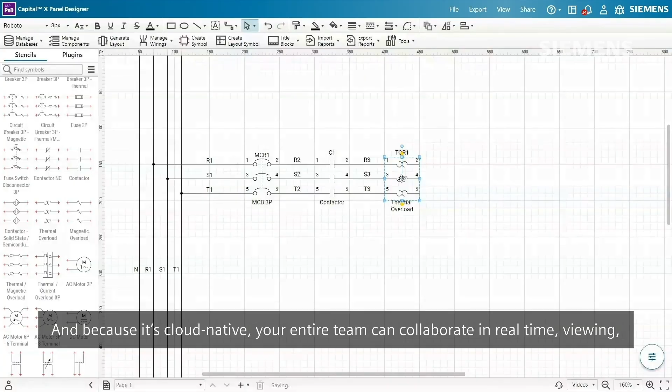Because it's cloud native, your entire team can collaborate in real time, viewing, editing, and commenting on the same drawing simultaneously, regardless of time zone differences. As a subscription-based model, it's scalable and eliminates the need for dedicated hardware—no physical servers, IT infrastructure, or costly maintenance fees. It's a flexible and cost-efficient choice for modern engineering teams.

If you need an offline workflow, the standard plan offers Capital Panel Designer on-premise, a desktop-based installable version of the software. This is ideal for use in environments without internet access or when working on-site during system commissioning. The subscription plan also includes access to the cloud-native Capital X Panel Designer, offering the flexibility to work seamlessly both online and offline. Capital X Panel Designer is trusted across a wide range of industries, including industrial machinery, heavy equipment, process manufacturing, energy, and more.

In this video, we'll walk you through the complete schematic design workflow, from setting up your drawing to exporting your final design in multiple formats. Let's begin with an overview of the dashboard layout.

To create a new drawing, click Create, then select New Drawing, or right-click anywhere and choose New Drawing. To open an existing drawing, either use the search bar to find specific drawings, templates, folders, or navigate directly to the drawing and click Open.

Select Share to instantly share your drawing via email or a link. This simplifies team collaboration by ensuring all your stakeholders have access to the latest revisions without back-and-forth emails. You can also set custom permissions when sharing to control who can view, edit, comment, or manage the drawing.

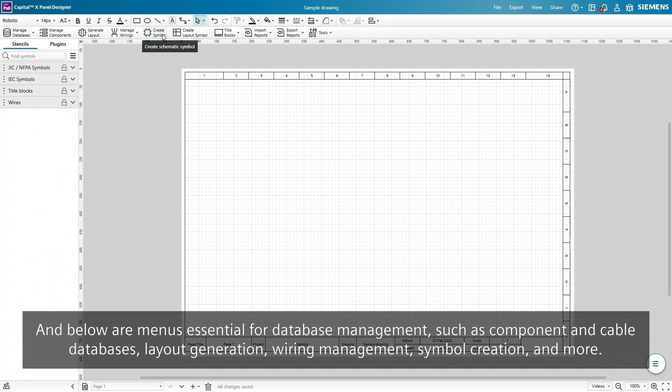On your left, the stencils give you instant access to thousands of pre-designed symbols for electrical, pneumatic, hydraulic, and P&ID drawings that are compliant with JIC and IEC standards. No need to search for symbols externally, just drag and drop them into your schematic for a faster circuit design.

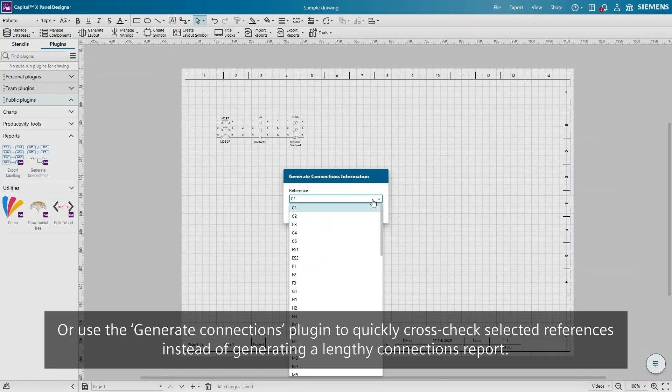If you switch to the Plugins tab, you can use our public plugins to automate tasks. For instance, the Export Labeling plugin automatically generates wiring labels, and you may easily modify and upload them to your label printer. Or use the Generate Connections plugin to quickly cross-check selected references instead of generating a lengthy connections report. You can even create custom plugins by selecting New Plugin and writing your own script.

In the bottom left corner, an icon indicates whether you're editing a personal or team drawing. Just beside it is the Pages menu, where you can set up or edit your page settings, including page size, orientation, margins, scale, and the measurement unit. We will go with the default settings for this demo.

One of the key benefits of Capital X Panel Designer is its powerful automation capabilities, which we will demonstrate later in this video. To manage these tools, go to File, Preferences, and drop down Capital X Panel Designer options. Here, you can enable or disable automation features like auto wiring, automatic wire splitting, and smart renumbering based on your workflow preferences.

Let's begin the schematic design process by building a PLC circuit. Along the way, we'll highlight Capital X Panel Designer's smart automation tools and productivity boosting features.

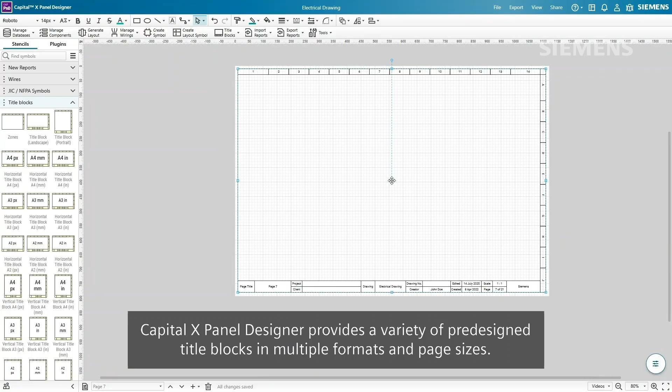First, we'll open the title block stencil to drop a title block on the drawing. X Panel Designer provides a variety of pre-designed title blocks in multiple formats and page sizes. The title blocks automatically include drawing information such as the page title, drawing name, scale, and more.

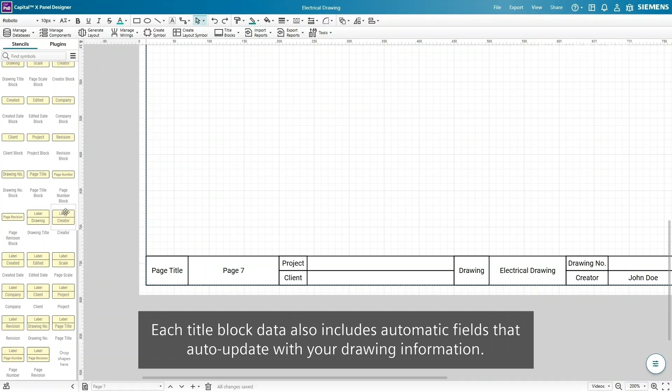You can also build your own title blocks by placing individual title block data from the stencil. Each title block data also includes automatic fields that auto-update with your drawing information. Once your custom title block is complete, go to Menu, Title Blocks, and select Create Title Block to save it into your stencil library.

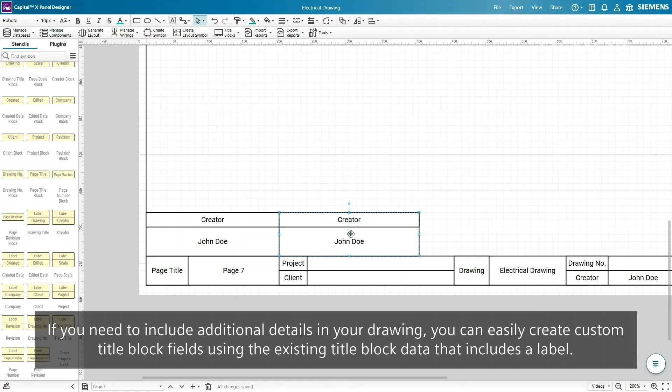With both pre-designed and customizable title block options, you can quickly create professional and consistent documentation while reducing manual input. If you need to include additional details in your drawing, you can easily create custom title block fields using the existing title block data that includes a label. Once dropped onto the page, align it with your title block, select the subshape, and enter your preferred label. For instance, we'll change the label to Last Revised By.

Then, go to the Title Blocks menu and select Insert Title Block Data. From here, enter your custom label and value and choose whether the changes should apply to the entire drawing or just the current page by setting the scope. Once complete, click OK to apply.

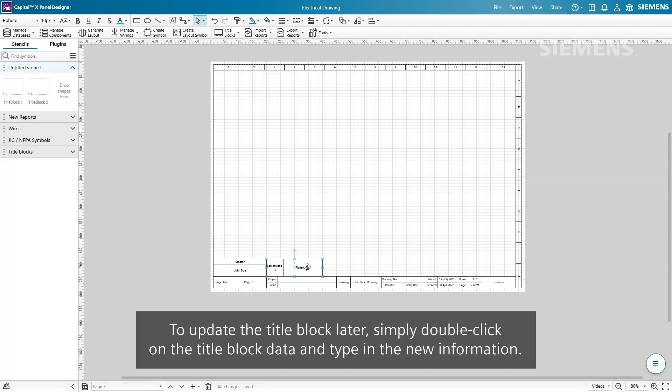If you intend to reuse this as a template in future projects, you may save it into your stencils like we demonstrated earlier. To update the title block later, simply double-click on the title block data and type in the new information. Alternatively, an easier way would be to right-click on the title block, select Edit Title Block, and update all the title block fields in one go.

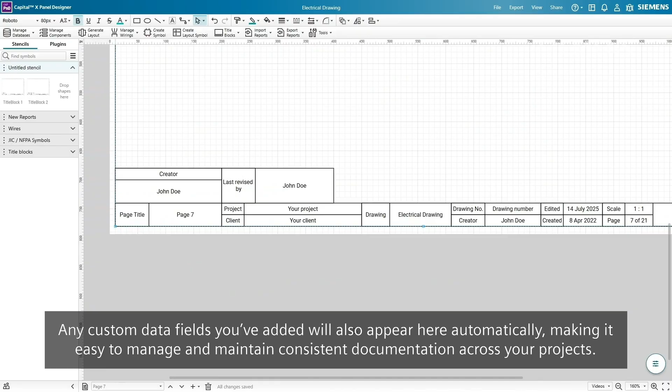Any custom data fields you've added will also appear here automatically, making it easy to manage and maintain consistent documentation across your projects. This flexibility allows you to tailor your title blocks to meet internal standards or customer-specific requirements.

When it comes to symbols, you have instant access to thousands of standards-compliant symbols in the stencils, but for specialized or industry-specific needs, you can also create your own custom symbols. To create one, start by drawing with shape tools or by importing a DXF DWG file.

We'll import and customize a MCB4P symbol in DXF DWG format as an example. Ungroup the imported shape to make necessary edits, and once done, group the elements again. Use the Draw Connectors tool to add connection points. Hold the Control key and click to place each connection point on your symbol.

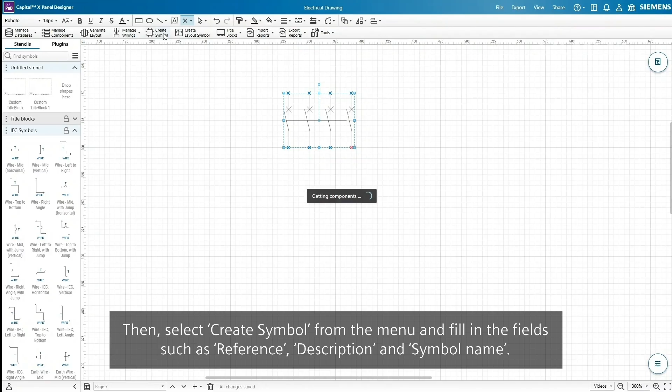Then select Create Symbol from the menu and fill in the fields such as reference, description, and symbol name. Choose the appropriate category and stencil for saving. Then, switch to the Pin Name tab to assign the pin names accordingly. Once everything is set, click OK to save the custom symbol to the stencil library.

You may drag and drop it into future projects without needing to recreate it from scratch. Like the built-in symbols, custom symbols are intelligent. They can be linked to real-world components and benefit from automation features like automatic numbering, making your designs faster and more accurate.

In addition to using our pre-designed symbols and creating custom symbols, you can also speed up your workflow by importing manufacturer-specific components directly from the CADENAS Cloud Part Library, 3Dfindit. Go to Manage Databases, select Component Database, and click Import from 3Dfindit to expand the window.

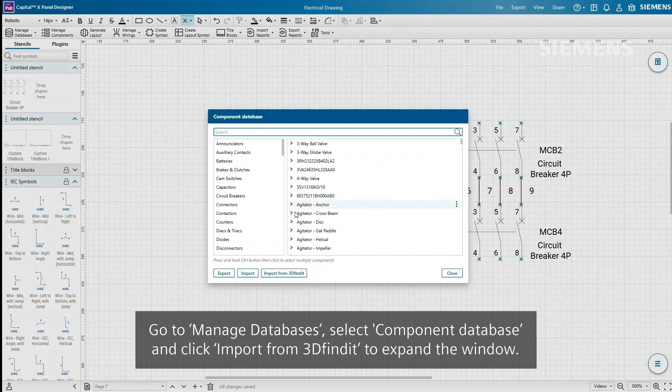There are millions of components and layouts available for your usage, where you can easily browse and select the one you need. If you have a specific component in mind, input its name or model number into the search box. Select the Send to CAD button to import both the component and its corresponding layout symbol into X Panel Designer.

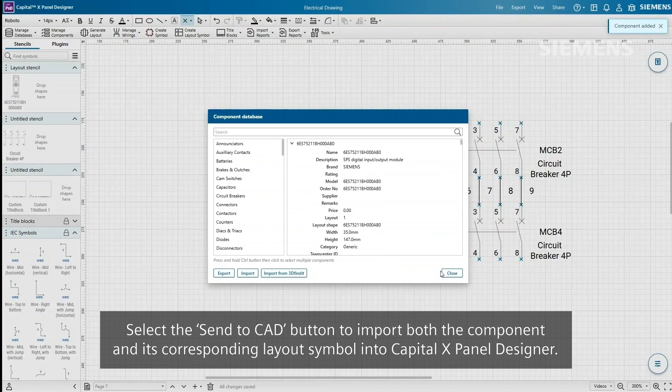You can then start assigning the component and layout to a symbol. This built-in integration eliminates the need to manually source and import parts from external sources, drastically reducing design time and ensuring greater consistency.

Now that we've added a title block, we can start placing wires and symbols. Designing schematics in X Panel Designer is fast and intuitive thanks to drag-and-drop functionality. Wires are extremely flexible, allowing you to easily duplicate or rename them by using the Edit Wire option or by clicking on the wire name.

As you can see, the duplicated wire name is automatically incremented. As we are designing a PLC circuit, drop a single-sided PLC symbol, right-click, and select Set PLC Module.

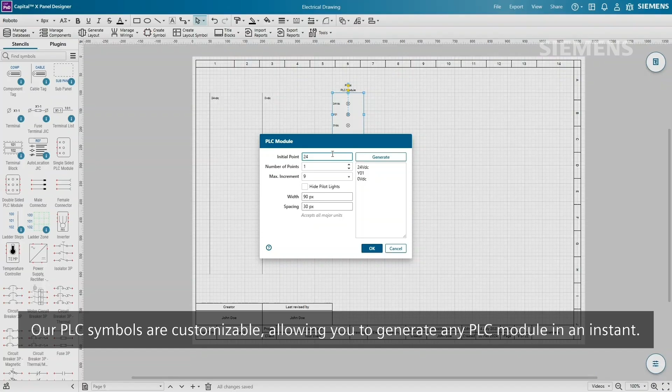Our PLC symbols are customizable, allowing you to generate any PLC module in an instant. In this case, we'll generate 10 output points, so we set the number of points fields to 10, adjust the spacing as required, and click Generate.

You may also manually modify the PLC labels by entering your preferred pin names. When done, click OK to generate the PLC module.

Next, connect the PLC points with wires. When two wires are connected, a connection dot is created automatically. When the wire is moved, the connection dot will be automatically deleted. To show or hide wire names, right-click and select Show or Hide Wire Name.

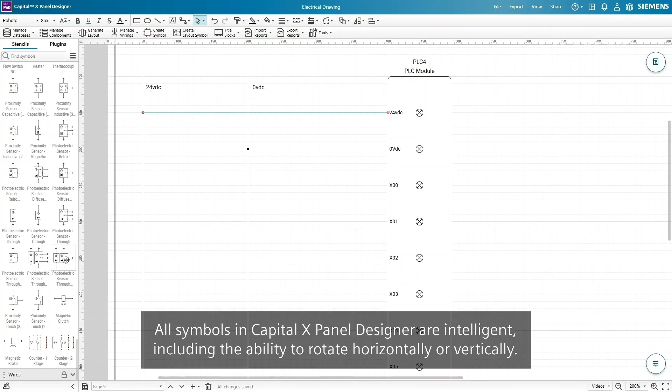Next, we'll drop a through-beam sensor symbol from the stencils and flip it horizontally. All symbols in X Panel Designer are intelligent, including the ability to rotate horizontally or vertically. Notice when the symbol is aligned with the PLC outputs, it is automatically wired.

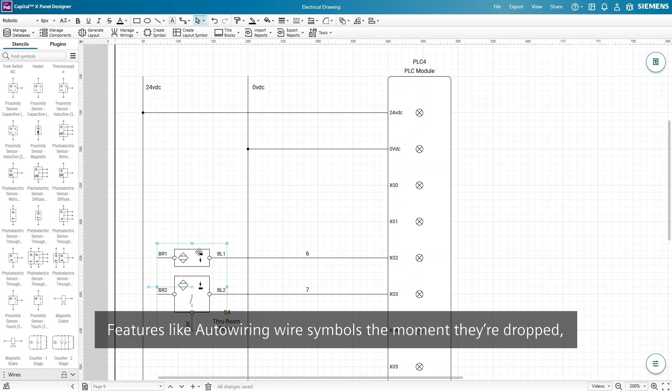Since wiring is one of the most frequent and time-consuming tasks in electrical design, we've automated it to save you time and effort. Features like auto-wiring wire symbols the moment they're dropped, and wires stay connected as you move the symbols, keeping your circuits clear and accurate with minimal manual work.

Now, we'll add a proximity switch symbol. By right-clicking and selecting Edit Reference, you can hide the reference or the description of the symbol.

When duplicating symbols, wires, or even entire circuits, X Panel Designer automatically renames them, saving you time from tedious manual renaming. Watch what happens when we place a selector switch symbol on an existing wire. The wire automatically splits and renames itself.

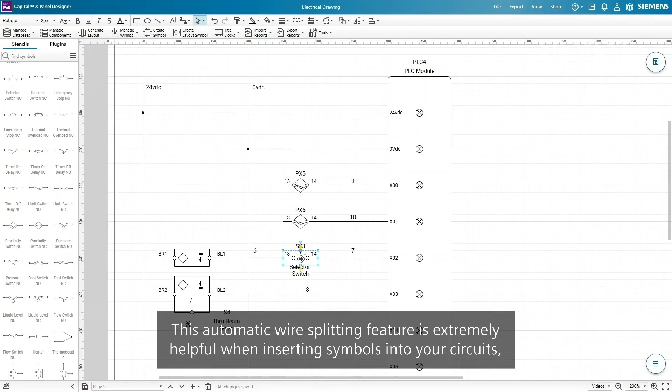This automatic wire splitting feature is extremely helpful when inserting symbols into your circuits, saving you the hassle of manually adjusting or redrawing connections. You may also change a symbol's description in the Edit Reference dialog and confirm by clicking OK.

Similarly, when we drop a push-button symbol on a wire, the wire automatically splits and renames itself. Let's go ahead and modify the symbol's description as well.

With automation built in, X Panel Designer saves you time at every step so you can focus more on design logic and less on repetitive work. Even complex schematics are made easy thanks to its smart automation tools and user-friendly interface.

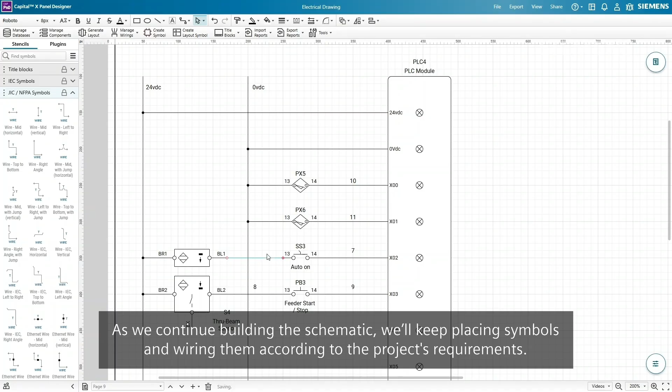As we continue building the schematic, we'll keep placing symbols and wiring them according to the project's requirements. You can freely reposition symbol descriptions or even hide them to ensure your drawing is neat and readable. And as shown earlier, wire names are fully editable. Simply click on the wires and type to rename them.

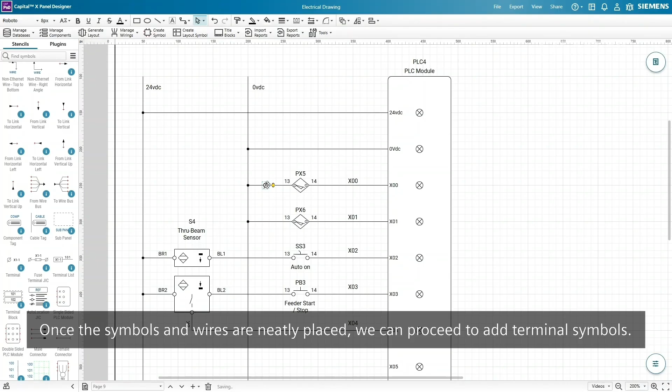Once the symbols and wires are neatly placed, we can proceed to add terminal symbols. Like all the other symbols in X Panel Designer, terminal symbols are intelligent. They can be easily duplicated and dropped directly onto wires. When placed, they automatically split the wire and rename it, saving you from manual rewiring.

After placing them, you have the option to name each terminal directly on the drawing, and these names will be generated in the terminal list later, ensuring consistent and accurate documentation. Alternatively, if you prefer to leave them unnamed during the initial placement, you can name all of them at once with a single click, which we'll demonstrate later. And as shown earlier, you may reposition the symbol descriptions by dragging the yellow handle.

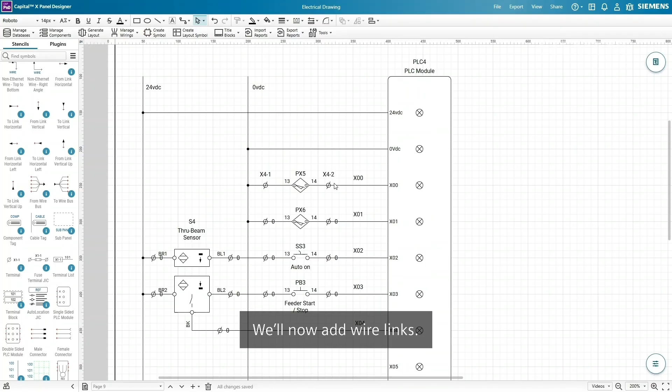We'll now add wire links. Wire links are virtual wires that extend a wire across different parts of your schematic, either on the same page or across pages. Wire links can automatically identify the location of the target wire when you connect them to your wires and double-click to pair them. Once paired, they will automatically display the wire name and location of the target link they are paired to. Double-click to jump directly to the paired link, simplifying navigation across complex designs.

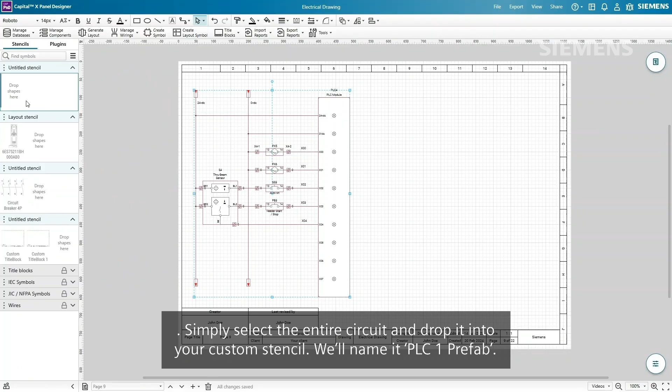In X Panel Designer, you can easily reuse your circuits by duplicating them or saving them to your stencils as prefab circuits. Simply select the entire circuit and drop it into your custom stencil. We'll name it PLC1 Prefab. If saved to a team stencil, it becomes automatically accessible to the entire team, streamlining collaboration and reducing repetitive work.

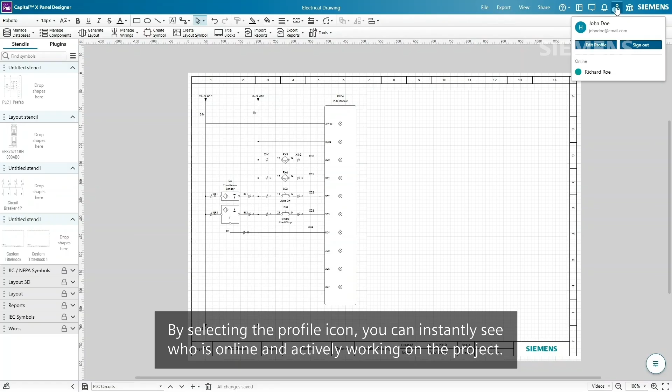As a cloud-native electrical CAD, X Panel Designer is built for real-time collaboration, allowing multiple team members to view, comment, and edit the same drawing simultaneously. By selecting the profile icon, you can instantly see who is online and actively working on the project. As shown here, my colleague already has this drawing open and will now take over to help complete it.

The moment they drop the PLC module onto the drawing, we can immediately see the changes on our end. All updates are automatically synchronized in real time, ensuring that everyone stays on the same page, literally. This seamless workflow helps teams collaborate effortlessly across locations and time zones, preventing communication delays.

To make collaboration even easier, Capital X Panel Designer includes a built-in chat box, allowing you to easily discuss projects with team members, clients, and stakeholders directly within the platform.

Here you can see that my colleague sent a quick message after completing their part of the drawing. Once done, go to the View menu and select Hide Chat Box to close it. You can access the chat box again by selecting Show Chat Box.

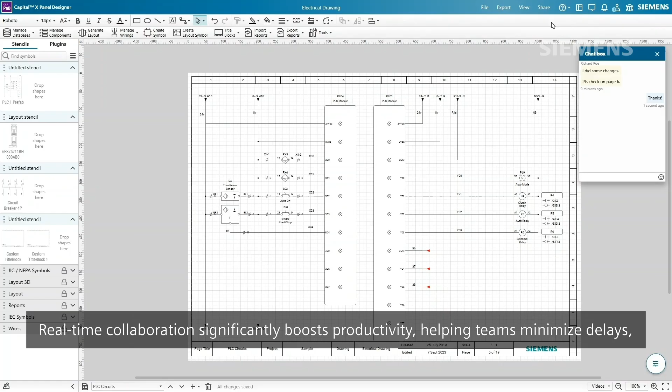Real-time collaboration significantly boosts productivity, helping teams minimize delays, avoid costly errors, and accelerate the overall design process, no matter where they're working from. Capital X Panel Designer automatically saves your progress and maintains a full version history, allowing you to roll back to any previous state of your drawing if needed.

To make it easier to identify specific points in your design process, you can name key versions by going to the File menu and selecting Name Current Version. This is especially useful for marking milestones or review stages, and we'll revisit this later when we demonstrate the version control feature. Let's save this page so that we can reuse it later.

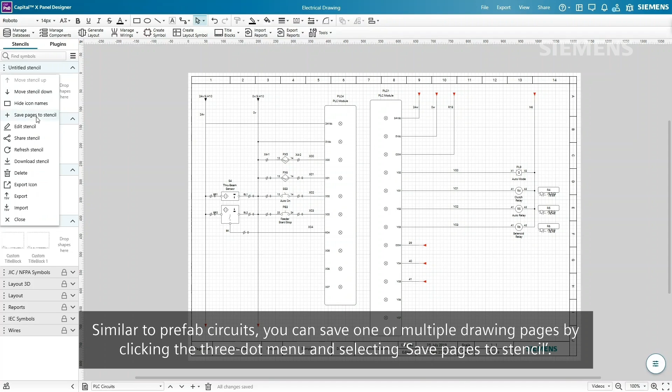Similar to prefab circuits, you can save one or multiple drawing pages by clicking the three-dot menu and selecting Save Pages to Stencil. Give the page a name and click OK to save it. This allows you to build a library of your commonly used circuits and full-page drawings, so you never have to redraw them from scratch again.

Beyond powerful automation tools, Capital X Panel Designer includes cross-referencing tools that make it easy to locate symbols and wires across complex multi-page schematics. To access real-time cross-reference information, right-click on any symbol and select Edit Reference.

On the bottom left is a list of all symbol references in your drawing, which you can filter by page. When you select a reference, its exact location appears on the right. Select it, and the symbol's position will be highlighted in the drawing. This also applies to wires.

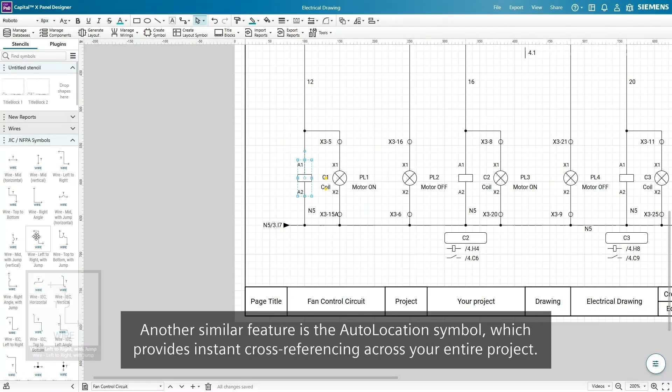Another similar feature is the AutoLocation symbol, which provides instant cross-referencing across your entire project. Drop it from the stencils, right-click, and select Locate Reference. Choose a reference, and the AutoLocation symbol will list all symbols with the selected reference and their locations.

This intelligent symbol updates as you make changes. Whenever a symbol is added, moved, or deleted, the AutoLocation symbol reflects those changes in real time, ensuring accurate cross-referencing at all times.

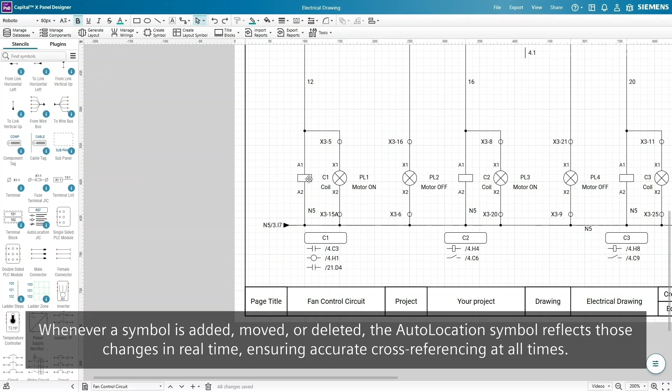Another cross-referencing tool we have in Capital X Panel Designer is the Real-Time Reference window, which provides a centralized view of all symbol references. As you make changes, this window updates automatically, adding new references when symbols are placed and removing them when deleted.

You can also instantly locate a symbol by selecting its reference, navigating to the selected symbol even over multiple pages. Together, these tools dramatically improve navigation, help prevent wiring errors, and reduce time spent cross-checking large or complex schematics. They're essential during panel assembly, where accuracy and traceability are critical.

Next, let's explore how Capital X Panel Designer simplifies the management of components and cables with intuitive menus, whether you're assigning, editing, or creating custom entries.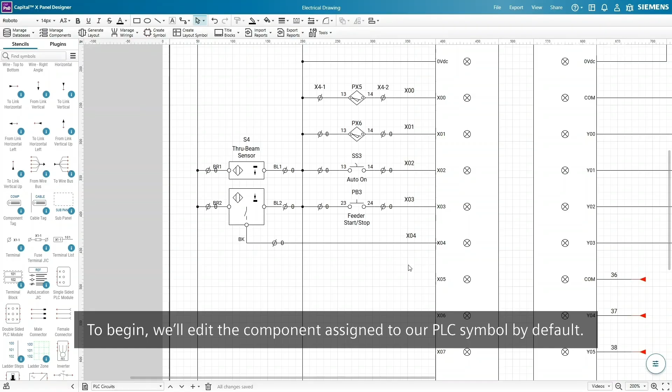To begin, we'll edit the component assigned to our PLC symbol by default. Right-click the symbol, select Edit Reference, then click the Component button. In this case, we'll assign the component we had imported from the CADENAS 3Dfindit library. Click Select to open the component database.

The component database stores all component specifications so that they can be used and reused on multiple projects and drawings. Components are organized by categories and sorted alphabetically, making navigation quick and intuitive. This categorization helps streamline your component selection process, especially when managing large libraries.

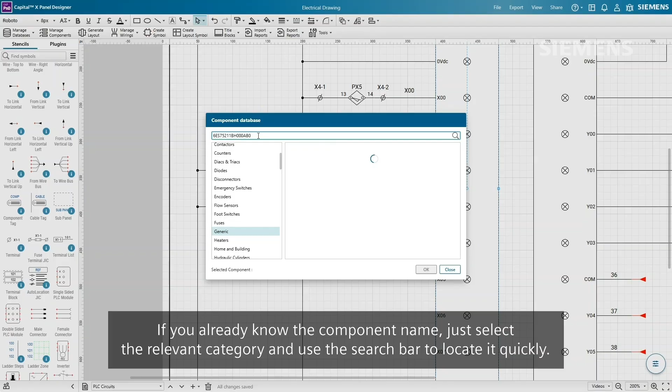If you already know the component name, just select the relevant category and use the search bar to locate it quickly. For example, you can paste the name of the component imported from CADENAS 3Dfindit and click OK to select it. Now let's customize the component's details.

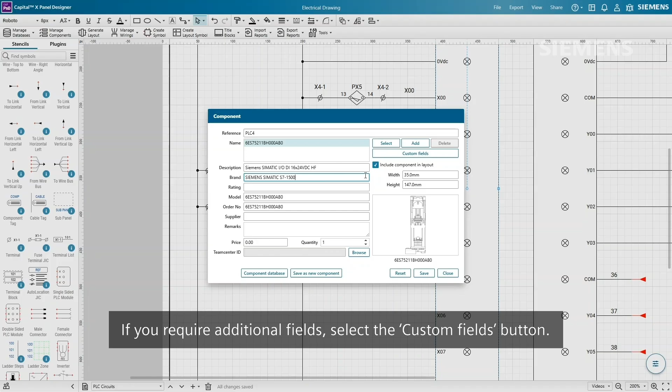You can edit fields such as description, brand, rating, model, order number, and even include remarks. If you require additional fields, select the Custom Fields button. Define the specifications in the label value columns. Select Add Field to add a new row of fields. For instance, here we'll add the maximum and minimum supply voltage.

These custom fields will also be generated in reports and component tags. Once done, click OK to save the custom field to the component, then select Save to store the updated component information.

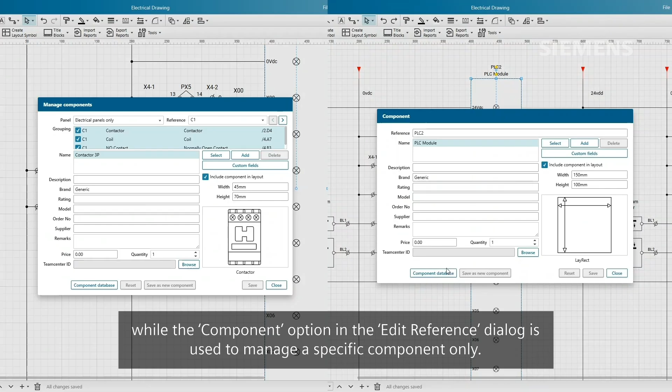Alternatively, you can use the Manage Components menu to manage, assign, and modify all components used across your drawing. This allows you to update component information project-wide, while the component option in the Edit Reference dialog is used to manage a specific component only.

Now let's look at cable management. From the Manage Databases menu, select Cable Database, then click the three dots menu to add a new custom cable or edit existing ones. We'll create a custom cable by filling in the required fields, then click OK to save.

To assign this cable to a wire in your drawing, right-click the wire and select Edit Wire to open the wire window. The wire window also includes real-time cross-reference information similar to the cross-referencing tools demonstrated earlier. Here you can view wire details, insert wires, and assign cables for the current wire. Click Cable, then click Select to assign your custom cable and confirm with the OK button.

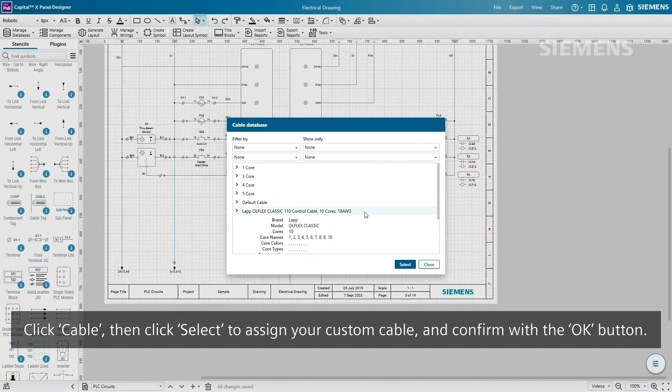You can also manage all cable and wire data across the project by going to Manage Wiring and selecting Manage Cables. This works much like the Manage Components feature, giving you centralized control over every cable and wire in the design. To display component information such as brand, description, and model directly on the drawing, you may drop a component tag symbol from the stencil.

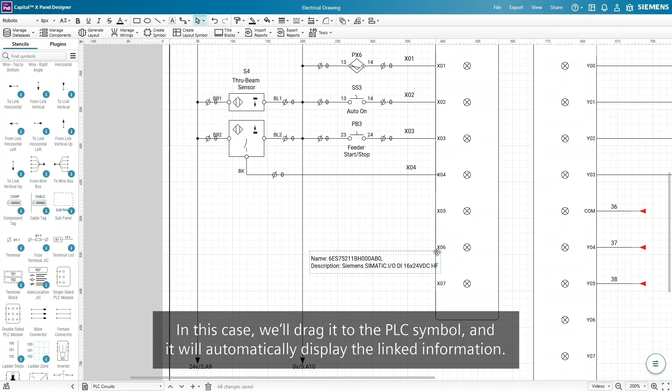Then drag the yellow control point to a symbol. In this case, we'll drag it to the PLC symbol, and it will automatically display the linked information. Alternatively, you can right-click on the component tag symbol and choose Select Reference to view the list of references in the drawing. Click on a reference and click OK to display the component information.

Right-click and select Edit Component Tag to choose the fields you need to display, such as the brand and model. Similarly, use the cable tag symbol to show cable details for your wires. Here's the custom cable we just created. Both symbols dynamically pull information from your assigned data, saving you from manual annotations and reducing documentation errors.

Here's an extra tip: if you need to update multiple component information, you can save time by exporting the material reference report and updating the details in bulk. Click the Export Reports button and choose Material Reference Report. Ensure that all fields are enabled for X Panel Designer to recognize it as an import file, then click OK.

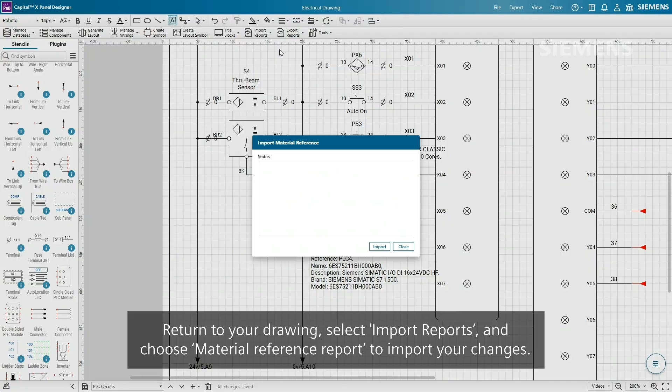Open the downloaded TSV or CSV file in your preferred spreadsheet editor and start updating the component information. After editing, save the file in the same format. Return to your drawing, select Import Reports, and choose Material Reference Report to import your changes. Your component information will be instantly updated, reflecting your modifications.

In X Panel Designer, you can simplify the process of updating design information by exporting and editing it in one go. With structured component and cable management, you can easily locate, modify, and reuse data across multiple projects while reducing manual entry. Next, let's look at how X Panel Designer simplifies terminal management with automated listing and renumbering features.

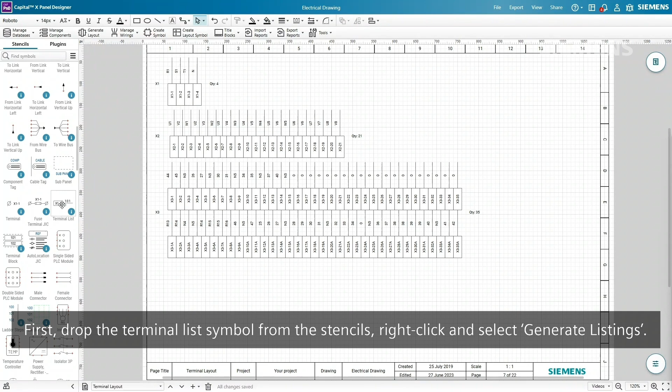As shown here, terminal listings have already been generated for other pages in this project. Now we'll generate the terminal listing for the PLC circuit we just created. First, drop the terminal list symbol from the stencils, right-click and select Generate Listings. You'll have the option to generate terminal lists for the current page or across all pages.

We'll select all pages to automatically include any terminals that haven't been listed yet. Click Generate to proceed. As you can see, the terminal symbols that we named in the PLC circuit page earlier are included in the terminal lists, and you may arrange these terminal lists to represent a multi-tier terminal block.

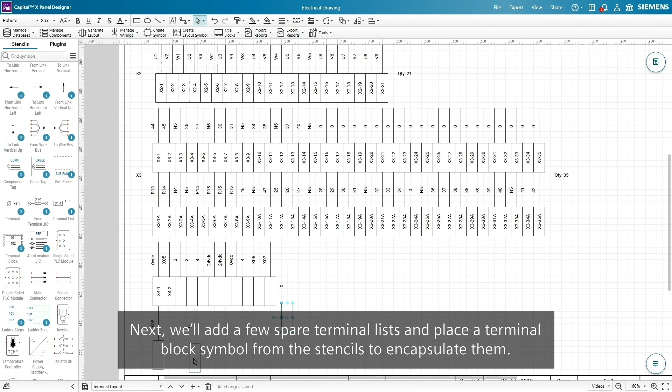Next, we'll add a few spare terminal lists and place a terminal block symbol from the stencils to encapsulate them. The terminal block will intelligently identify stacked multi-tier terminals and treat them as a single unit, automatically updating the quantity. This not only saves time, but also helps prevent manual errors. You can also freely reposition the labels to maintain a clean and organized layout.

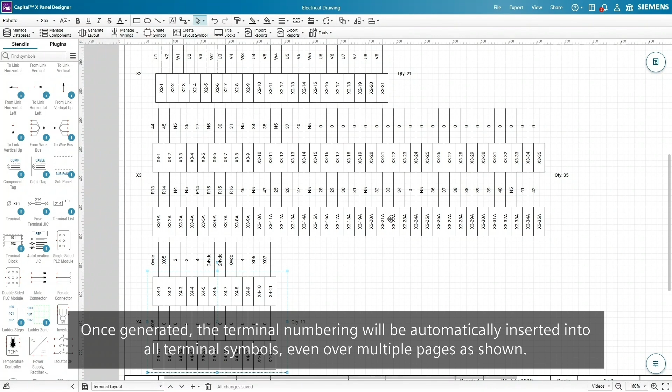To generate terminal numbering for the blocks, right-click, select Renumber Terminals, set the starting number, and click OK. Once generated, the terminal numbering will be automatically inserted into all terminal symbols, even over multiple pages. As shown, the terminal symbols we placed on the PLC circuit drawing are renumbered automatically.

If needed, you can also assign a specific component to a terminal block by selecting Edit Terminal Block. You may select or add a custom terminal from the component database or even adjust its layout. With these automation features, X Panel Designer eliminates manual terminal management tasks, helping you define clear and structured connection points, reducing wiring errors, and simplifying panel assembly.

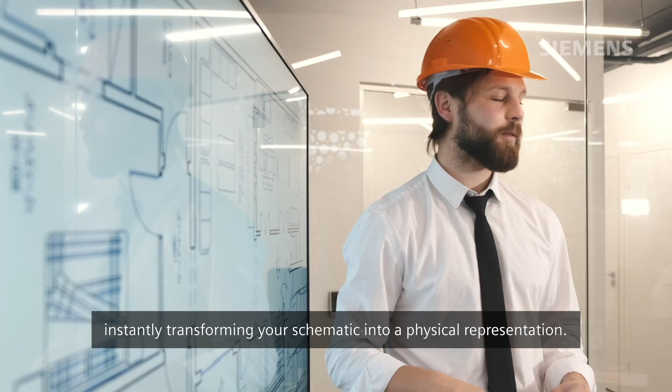Now that we have assigned components to our symbols, we'll proceed to generate the panel layout. Capital X Panel Designer simplifies this step with automatic layout generation based on real-world dimensions, instantly transforming your schematic into a physical representation. Select the Generate Layout menu.

You'll have the option to generate layouts for all components at once or to do so selectively. Since layouts have already been generated for some pages in this project, we'll generate layout only for the newly added components by clicking Generate. As shown, the layouts are instantly generated on this drawing.

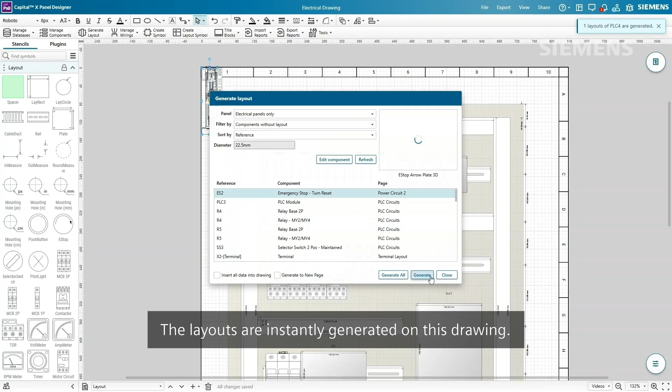If there are modifications to your schematics, simply generate layout again, and the panel layout will be updated, ensuring your physical layout stays in sync with your design.

Next, let's assemble the layout on a DIN rail, which you can drag and drop directly from the layout stencils. As we place layout symbols onto the DIN rail, notice how they automatically snap into position.

This feature, known as automatically snap layout symbols on rails, dramatically speeds up your layout process by aligning components accurately without the need for manual adjustments.

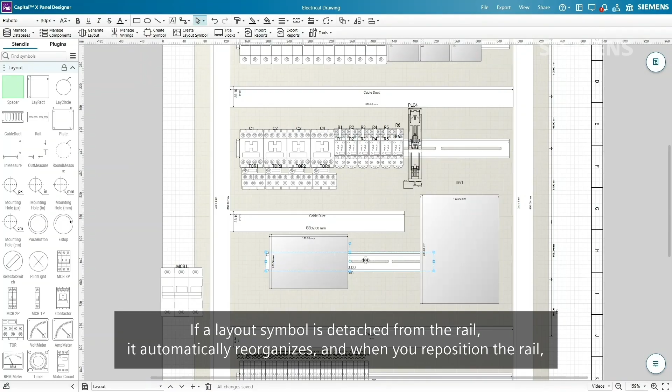If a layout symbol is detached from the rail, it automatically reorganizes. And when you reposition the rail, all attached symbols move with it, preserving the layout structure effortlessly.

In addition to standard layout views, Capital X Panel Designer also allows you to create front panel layouts using 3D layout symbols. You can find a variety of 3D symbols in the Layout 3D stencils, which can be assigned as a component's layout before generating it.

Alternatively, you can directly drag and drop them from the stencils into your drawing. This provides a complete visual of your panel, improving physical planning and ensuring accurate placement and spacing.

With automatic layout generation and drag and drop assembly, Capital X Panel Designer helps you move from schematic to panel with speed, accuracy, and minimal effort, making it easier to deliver high-quality designs ready for real-world implementation.

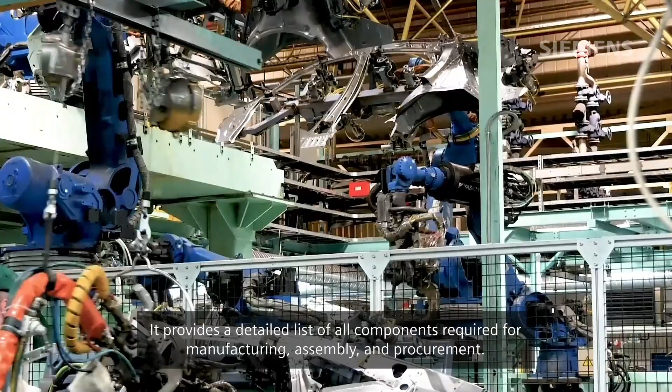We're now in the final stage of schematic design, which is creating reports, especially the Bill of Materials or BOM report. It provides a detailed list of all components required for manufacturing, assembly, and procurement.

Capital X Panel Designer streamlines this process by automatically generating reports, eliminating the need for manual compilation, and significantly accelerating your report drafting process.

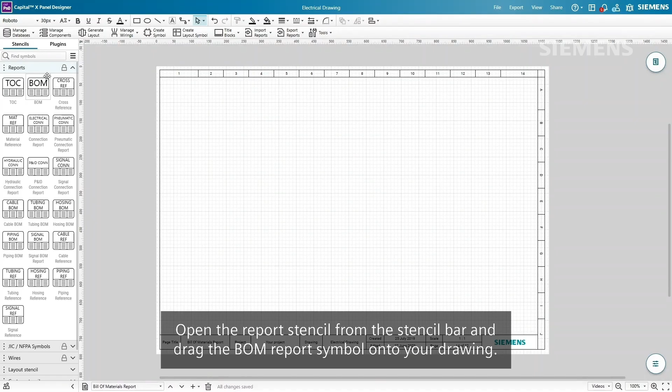Open the report stencil from the stencil bar and drag the BOM report symbol onto your drawing. Right-click and select Generate Report.

You can customize the fields to include in the report, such as brand, rating, model, and even custom fields we added earlier. Then click OK to generate. The report will accurately reflect the component specifications in your schematic, including the custom information we included earlier.

All generated reports automatically fit to content and can be resized by dragging the handles. If a report spans multiple pages, you can distribute it across the drawing as needed, maintaining clean and readable documentation.

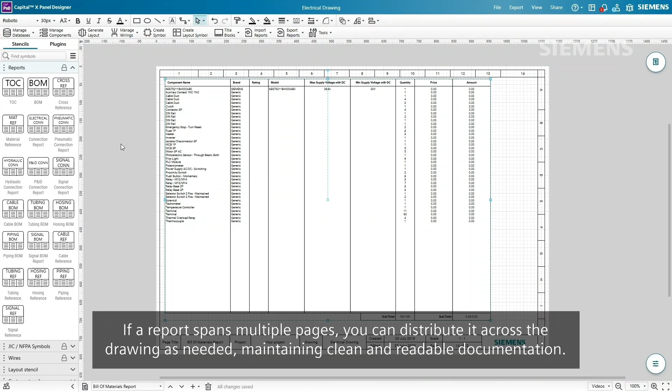Beyond BOM, we also have various time-saving report symbols such as connection report, cable BOM, and even table of contents.

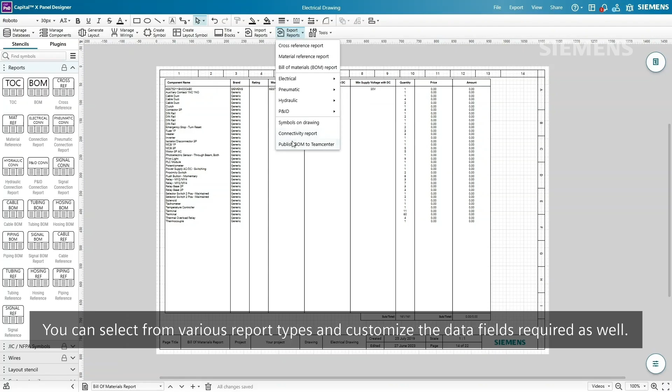All reports in Capital X Panel Designer can be easily exported in TSV or CSV formats through the Export Reports menu. You can select from various report types and customize the data fields required as well.

Once exported, reports can be opened in any spreadsheet editor and can be accessed by non-engineers like procurement or sales teams to generate quotations, purchase orders, or invoices. This capability not only increases productivity within the engineering team, but also enhances operational efficiency across departments.

For some reports like material reference, wires on drawing, and symbols on drawing, you can import the edited reports back into Capital X Panel Designer.

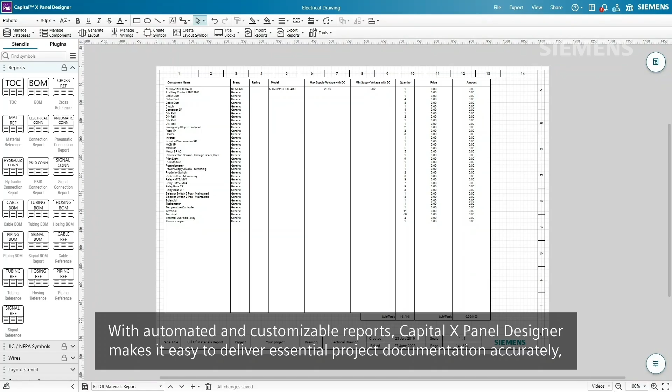This allows you to apply external or bulk changes directly to your drawing, enabling a smooth and efficient workflow. With automated and customizable reports, Capital X Panel Designer makes it easy to deliver essential project documentation accurately, efficiently, and without tedious manual work.

Now that we've generated the necessary reports, the next step is to export our work in the formats required, whether for documentation, collaboration, or integration with other systems.

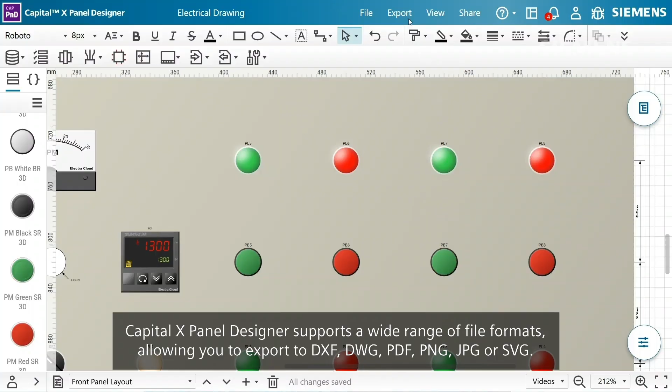Capital X Panel Designer supports a wide range of file formats, allowing you to export to DXF, DWG, PDF, PNG, JPG, or SVG. This gives you the flexibility to share and reuse your designs however you need.

To demonstrate, we will export the front panel layout in DXF. Go to the Export menu and select Export as DXF. You will have the option to export a single page or all pages. As an example, we'll export just the current page.

As shown, the exported DXF includes real-world dimensions of the components, ensuring accurate reference for manufacturing or mechanical integration.

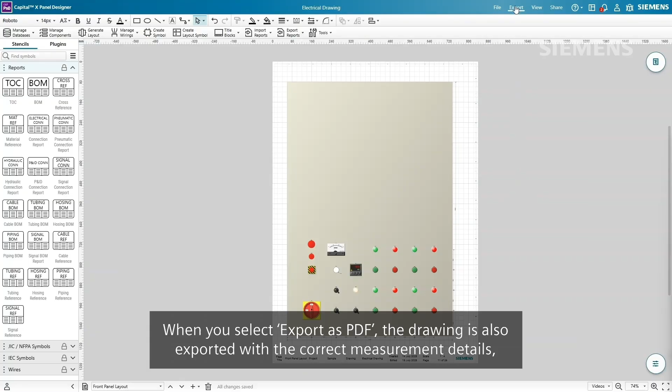Let's do the same for PDF export. When you select Export as PDF, the drawing is also exported with the correct measurement details, making it ideal for printing, documentation, or review by non-CAD users.

These flexible export capabilities not only support cross-functional collaboration, but also streamline production workflows by ensuring everyone, from engineers to fabricators, has access to clear, accurate design data.

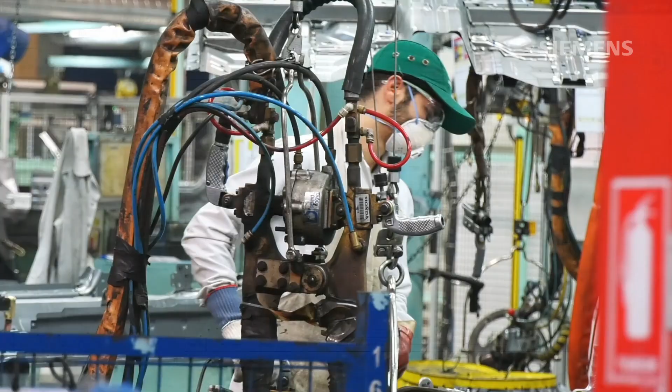Next, let's take a look at the version control feature in Capital X Panel Designer. Go to the File menu and select Version History to view your drawing's version history.

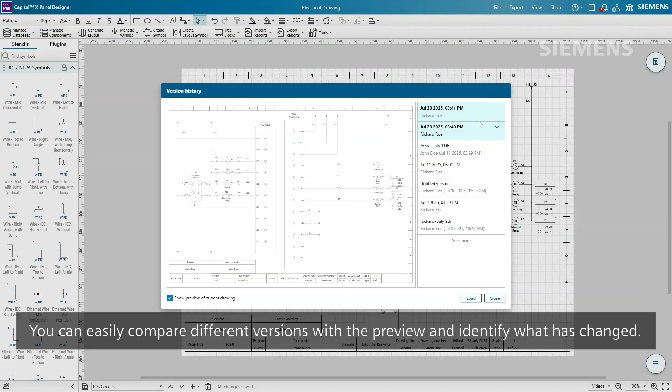If it is a team drawing, changes made by different team members are recorded as well, making it easy to view who has made changes and track progress. You can easily compare different versions with the preview and identify what has changed.

Notice that the version we named earlier appears on this list. If you need to revert to a previous state to fix an error or restore an earlier version, click Load to roll back.

Version control is an essential feature for maintaining accuracy, collaborating confidently, and safeguarding your work.

With the circuit fully designed and documented, we have now completed the schematic creation process. Capital X Panel Designer has helped us move from start to finish efficiently thanks to its intelligent automation, convenient collaboration features, and powerful design tools.

Next, let's explore how Capital X Panel Designer works hand-in-hand with other Siemens engineering software to enable a connected, end-to-end design experience. Capital X Panel Designer is more than just a standalone design tool, it is a part of a broader digital engineering ecosystem.

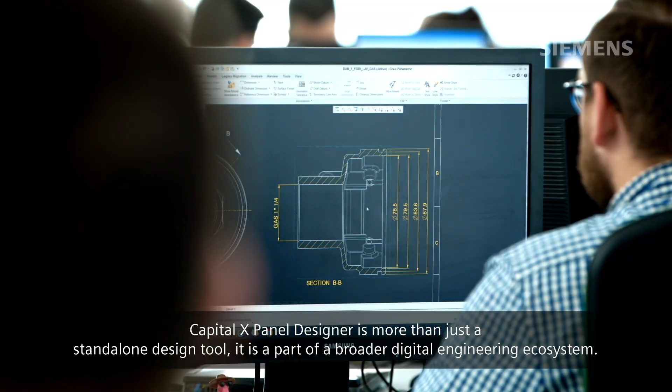Currently, Capital X Panel Designer integrates with a few Siemens software like Teamcenter, Solid Edge, and NX, supporting a more connected and efficient engineering workflow.

With Teamcenter integration, you can generate or update BOM in Teamcenter from Capital X Panel Designer and also create and assign components from Capital X Panel Designer to Teamcenter components.

Before publishing BOM to Teamcenter, you'll need to complete the initial integration setup on the Teamcenter server. This step requires technical configuration, so be sure to follow our help article for step-by-step guidance.

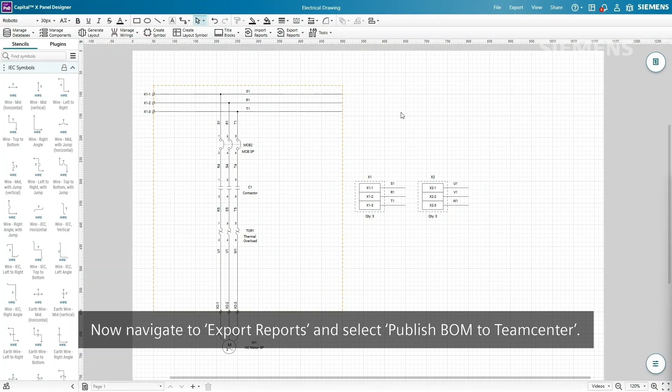Once that's done, configure the Teamcenter host in the Preferences dialog, ensuring accurate mapping between both systems. Now navigate to Export Reports and select Publish BOM to Teamcenter.

A dialog will appear prompting you to log in to your Teamcenter account. Enter your host, username, and password to proceed.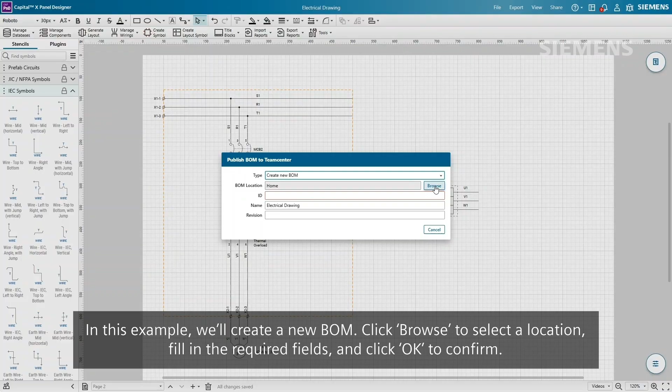You'll have the option to either create a new BOM or update an existing one. In this example, we'll create a new BOM. Click Browse to select a location, fill in the required fields, and click OK to confirm.

In the Map Component to Teamcenter dialog, you'll be able to assign existing Teamcenter components or create new ones by entering their IDs. Click Create to Map, and once all components are linked, select OK to publish the BOM to Teamcenter.

Let's open Teamcenter and look for the BOM we have just created. As shown, the new BOM has been successfully created and includes the components we mapped.

Next, we'll demonstrate how Capital X Panel Designer integrates seamlessly with mechanical CAD tools like Solid Edge and NX. This helps eliminate manual entry, reduce errors, and keep electrical and mechanical CAD teams aligned so you can route cables and generate core lengths faster and more accurately.

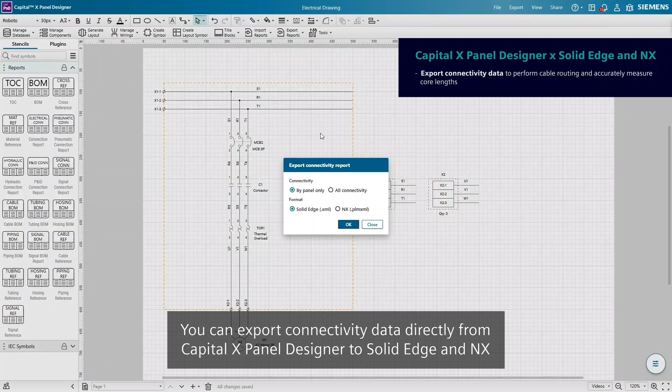You can export connectivity data directly from Capital X Panel Designer to Solid Edge and NX to perform cable routing and accurately measure core lengths.

This integration also provides the ability to import back the data from Solid Edge and NX to update the core length and automatically generate cable BOM or other reports in Capital X Panel Designer, reducing manual entry. This provides engineering teams with a streamlined workflow as cable routing, core length measurement, and cable BOM generation become one continuous automated process.

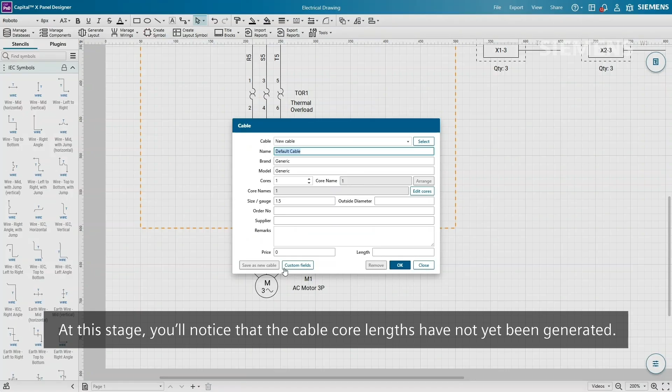We'll begin by demonstrating Solid Edge integration. In this demo, we're using a simple circuit that includes a main panel and a motor. At this stage, you'll notice that the cable core lengths have not yet been generated.

To export connectivity to Solid Edge, go to Export Reports and select Connectivity Report. In the dialog, you can choose to export either by panel or the entire project's connectivity. For this example, we'll export by panel only.

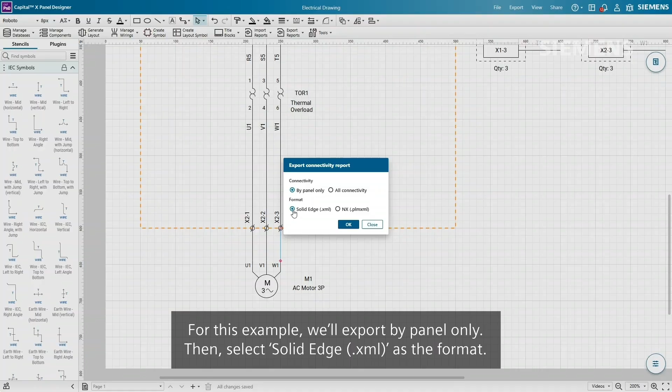Then select Solid Edge (.xml) as the format. An XML file will be downloaded.

Next, open Solid Edge and import the connectivity data by launching Harness Wizard. Choose Capital X Panel Designer from the ECAD dropdown, click Browse to upload the XML file, and finally click Next.

For demonstration purposes, only 2 items are shown here as we've chosen to export connectivity by panel only. In real-world panel assembly, this list may include many more items depending on the scale of your projects.

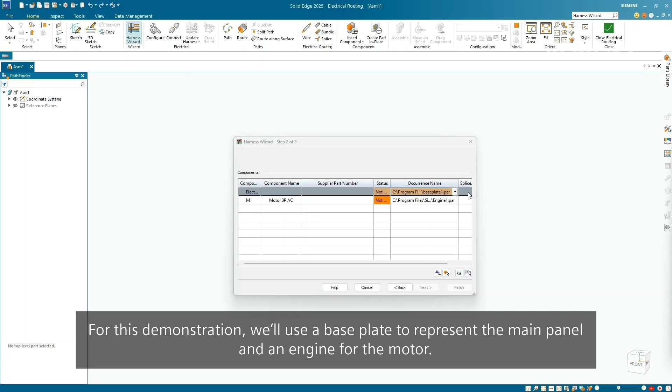To begin assigning physical parts to the imported components, right-click and select Browse to match each part accordingly. For this demonstration, we'll use a base plate to represent the main panel and an engine for the motor. Select the Populate button to insert these components into your mechanical layout.

You can click on any item in the dialog to highlight its position in the design. Click Next to assign the terminal connections in the drawing. Once completed, select Finish to generate the connections between components.

Notice how the connections are accurately routed between the 2 parts, even when the motor is repositioned. On the left panel, you can select any component to see it highlighted in the layout.

To complete the workflow, we can now export the core lengths from Solid Edge. Go to File, Save As, and Save as ECAD. Select Capital X Panel Designer from the dropdown and click OK.

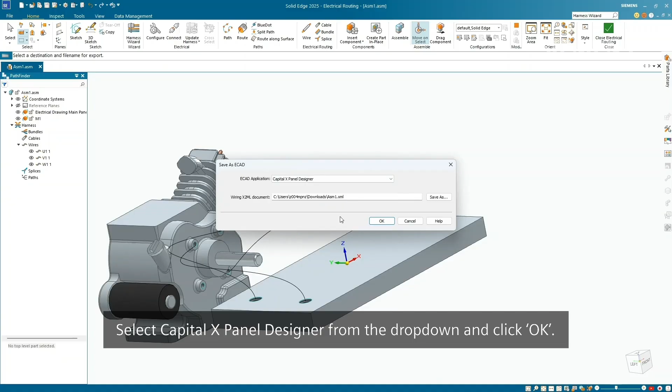Return to Capital X Panel Designer, then go to Import Reports and select Connectivity Report to import the updated XML file. As you can see, the cable core lengths are automatically updated based on the routing completed in Solid Edge. If you are generating a cable BOM, this information will be included or updated in the cable BOM as well.

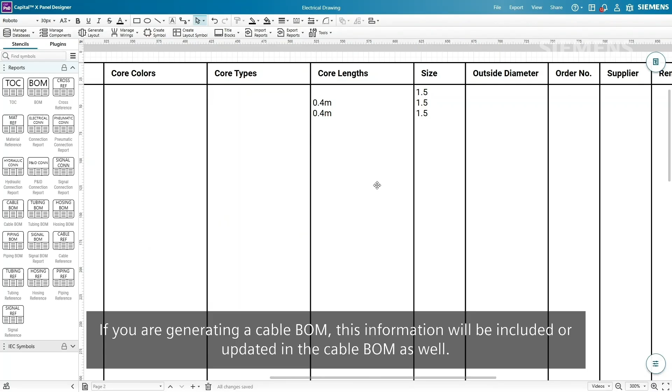The NX integration follows a similar workflow to what we just demonstrated with Solid Edge. Go to Export Reports and select Connectivity Report.

Once again, you can choose to export either by panel or all connectivity. We'll export by panel only. Then select NX (.plmxml) as the format and download the plmxml file.

Launch NX and import the file by right-clicking and selecting Import, followed by Update. The imported components will appear in the Electrical Component Navigator on the left panel.

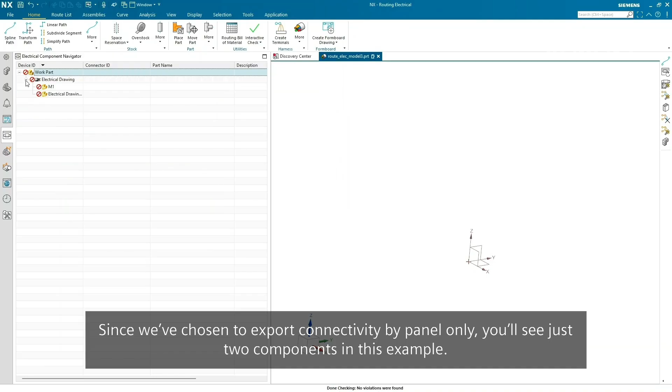Since we've chosen to export connectivity by panel only, you'll see just 2 components in this example. In actual projects, this list will typically be longer, depending on the complexity and size of the panel.

Next, right-click on the component and select Place to insert and assign the components as parts. Again, we'll assign a base plate to represent the main panel and an engine to represent the motor for this demo. Once placed, go to the Electrical Connection Navigator on the left panel to begin wiring the components.

From the top menu, select Spline Path and connect the ports from the motor to the terminals on the base plate. When done, click Apply.

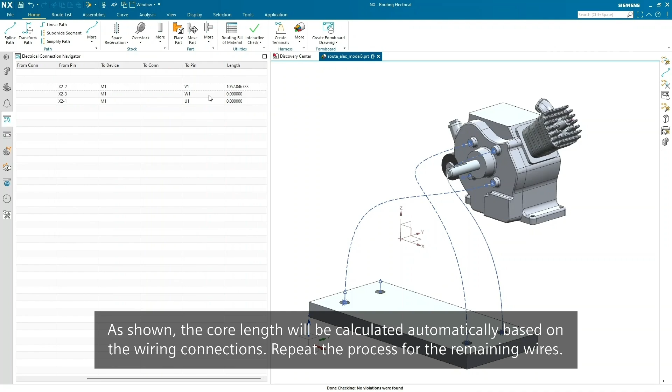Next, to retrieve the core lengths, right-click a core and choose Auto Route followed by Pin Level. As shown, the core length will be calculated automatically based on the wiring connections. Repeat the process for the remaining wires.

Now that we have completed routing in NX, right-click the panel and select Export All to export the updated file. Back in Capital X Panel Designer, you'll notice the cable core lengths have not been updated yet.

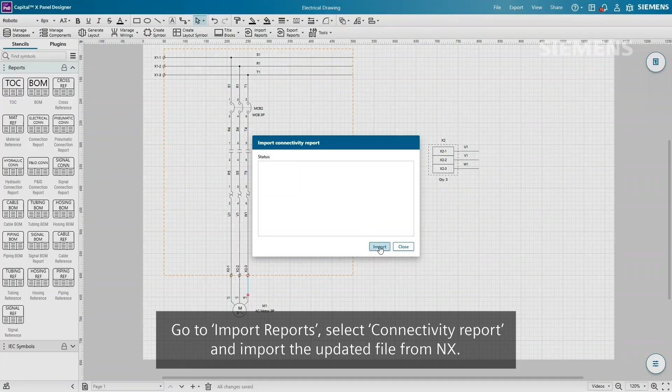Go to Import Reports, select Connectivity Report, and import the updated file from NX. Once imported, the core lengths will be updated automatically in your drawing. These values will also be reflected in the cable BOM report.

With these integrations, Capital X Panel Designer helps engineers across design teams eliminate data silos and ensure consistency, accelerating product development and improving design accuracy.

Whether it's syncing BOMs with PLM, routing cables in 3D, or updating core lengths automatically, these integrations save time, reduce manual effort, and make collaboration between teams more efficient.

And this is just the beginning. More integrations are currently in development, expanding Capital X Panel Designer's ability to support even more tools in your engineering ecosystem. Capital X Panel Designer isn't just limited to creating electrical schematics.

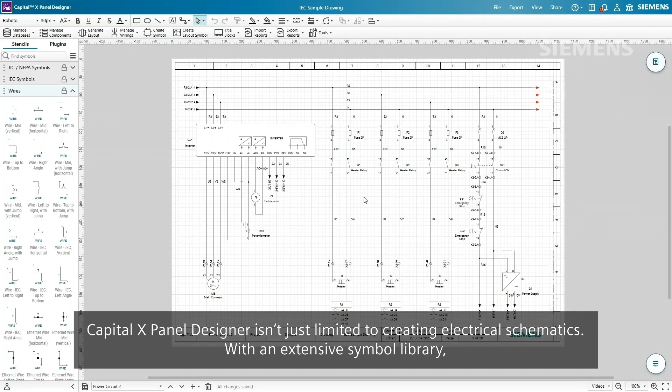With an extensive symbol library, it also supports pneumatic, hydraulic, and P&ID drawings, making it a versatile solution for multidisciplinary projects and engineering teams. Here, you can see a few sample drawings created entirely within the platform, and you may

save these as an editable copy to your own account. These include integrated control systems with pneumatic valves, hydraulic actuators, and process instrumentation.

These capabilities make Capital X Panel Designer highly suitable for industries such as manufacturing, process automation, oil and gas, and mechanical systems where electrical design needs to be integrated with fluid power and process control schematics.

Whether you're creating standalone electrical circuits or complex multi-domain schematics, Capital X Panel Designer provides the tools to design with confidence. Now that you've seen what Capital X Panel Designer can do, it's time to experience it for yourself.